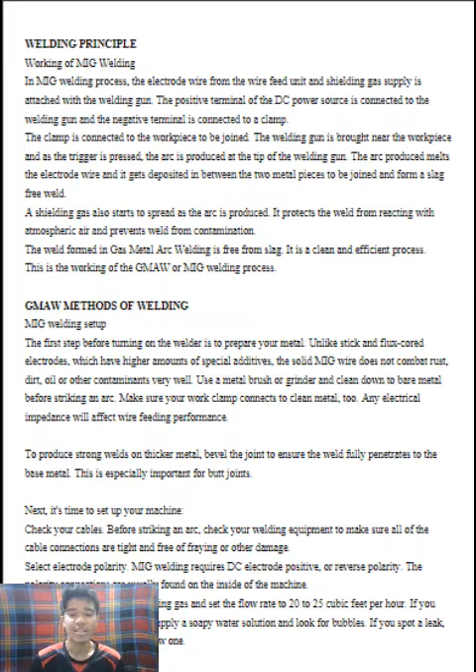First, the working of MIG. In MIG welding process, the electrode wire from the wire feed unit and shielding gas supply is attached with the welding gun. The positive terminal of the DC power source is connected to the welding gun, and the negative terminal is connected to a clamp. The clamp is connected to a workpiece to be joined. The welding gun is brought near the workpiece, and as the trigger is pressed, the arc is produced at the tip of the welding gun.

The arc produced melts the electrode wire and it gets deposited between the two metal pieces to be joined, forming a slag-free weld. A shielding gas also starts to spread as the arc is produced. It protects the weld from reacting with atmospheric air and prevents contamination. The weld formed in gas metal arc welding is free from slag. It is a clean and efficient process. This is the working of GMAW or MIG welding process.

Next is MIG welding setup. The first step before turning on the welder is to prepare your metal. Stick and flux core electrodes have higher amounts of special additives. The solid MIG wire does not combat rust, dirt, oil, or other contaminants very well. Use a metal brush or grinder and clean down to bare metal before striking an arc. Make sure your work clamp connects to clean metal too, as any electrical impedance will affect wire feeding performance.

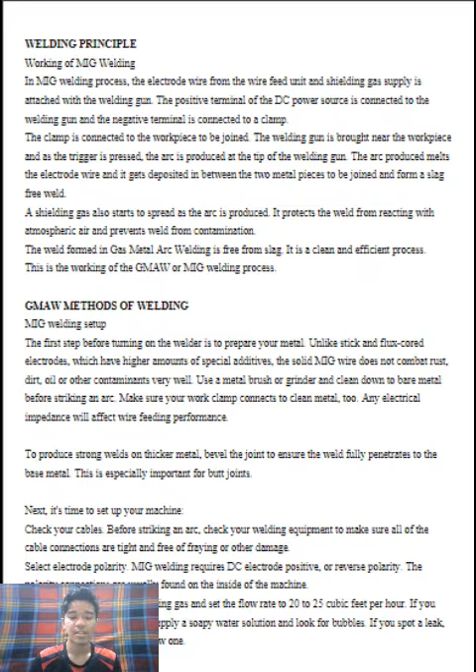Check tension. Too much or too little tension on either the drive rolls or the wire spool hub can lead to poor wire feeding performance. Adjust according to your owner's manual. Inspect consumables. Remove excess spatter from contact tubes. Replace worn contact tips and liners and discard the wire if it appears rusty.

Next is welding equipment. Besides the welding gun, the actual equipment required for the GMAW process includes an electric power supply, the electrode wire feed unit, and a source of shielding gas. The gun guides the electrode wire, current wire, and shielding gas tube. As described in the next section, self-regulation of the arc length is maintained by a constant voltage power supply with a constant wire feed speed unit.

Alternatively, a constant current voltage supply can be used with arc voltage controlling the wire feed speed. Next is shielding gas. The major shielding gases used for the GMAW process are oxygen, argon, carbon dioxide, and helium, or a combination of these four gases. The gases used in the shielding gas system can be classified either as inert gases, which have their outer electron subshells completely full and are stable, or chemically reactive gases, such as carbon dioxide and oxygen, which do not have their outer electron shell filled, making it possible for bare electrons to combine with other elements in the welding zone to create impurities.

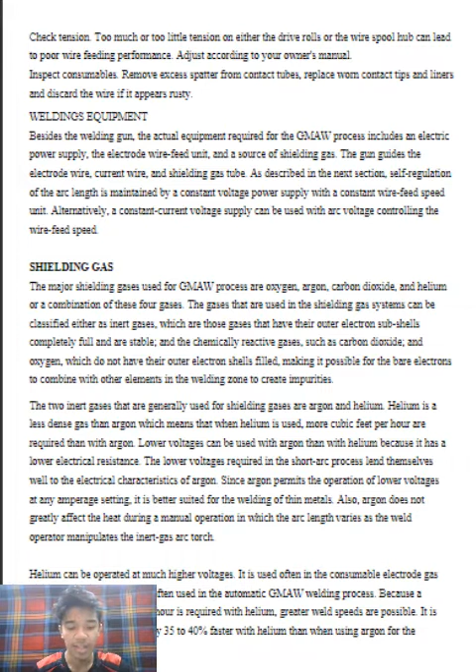Also, argon does not greatly affect the heat during manual operation, in which the arc varies as the weld operator manipulates the inert gas arc torch. Helium can be operated at much higher voltages. It is often used in the consumable electrode gas arc welding process, and it is often used in the automatic GMAW welding process because a greater flow of cubic feet per hour is required with helium. Greater weld speeds are possible; it is possible to weld approximately 35 to 40% faster with helium than when using argon as the shielding gas.

Lastly, GMAW electrode.

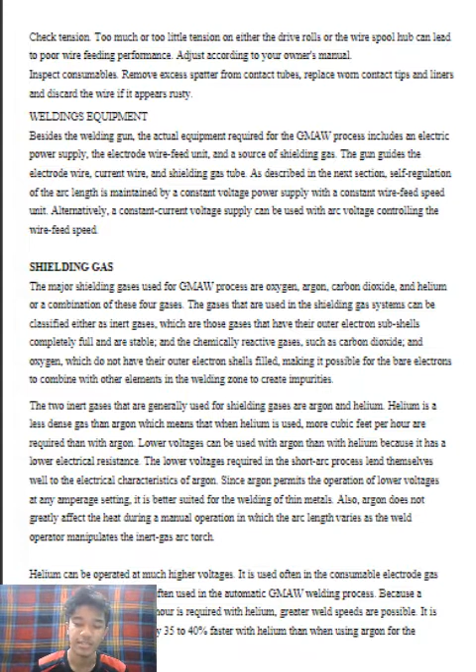Gas metal arc welding.

GMAW is an arc welding process that uses a consumable wire electrode and shielding gas, which a welding gun feeds to the joint. An electrical arc between the wire and base metal generates heat that melts both, while shielding gas protects the molten weld pool from harmful atmospheric gases.

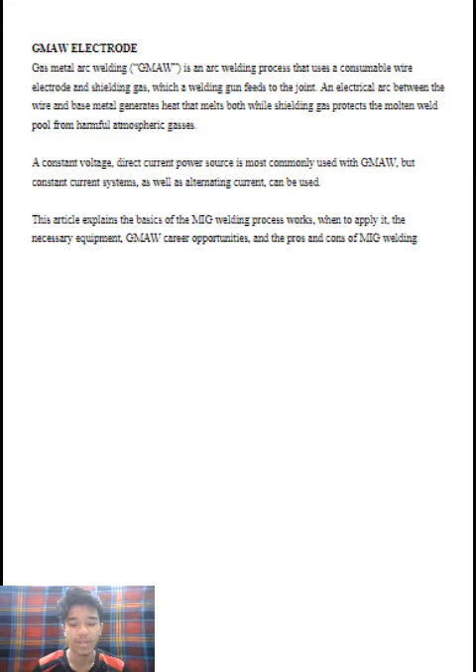A constant voltage direct current power source is most commonly used in GMAW, but constant current systems as well as alternating current can also be used.

These articles explain the basics of how the MIG welding process works, when to apply it, the necessary equipment for GMAW, career opportunities, and the pros and cons of MIG welding.

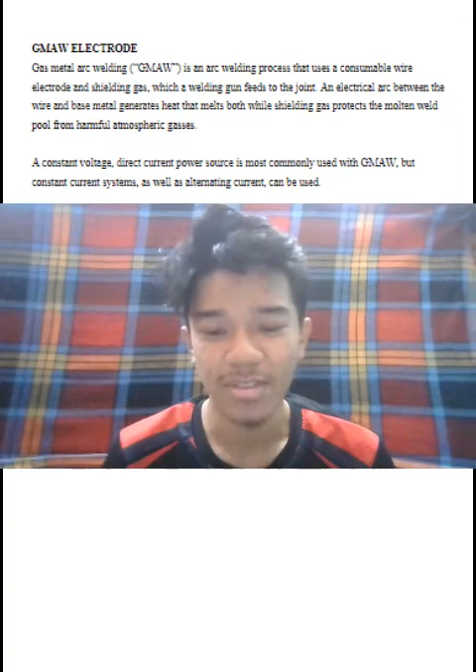Today I'm going to list the advantages and disadvantages of GMAW compared with other arc welding. Advantage 1: minimal cleaning, no slag.

2. Good for through-hardened or dirty steel with risk of porosity. 3. GMAW can be fully automatic, resulting in higher productivity. 4. GMAW tends to produce a better quality weld.

5. Easy to control electrode consumption. 6. GMAW can be used for all metals and alloys. 7. GMAW machinery is easy to use.

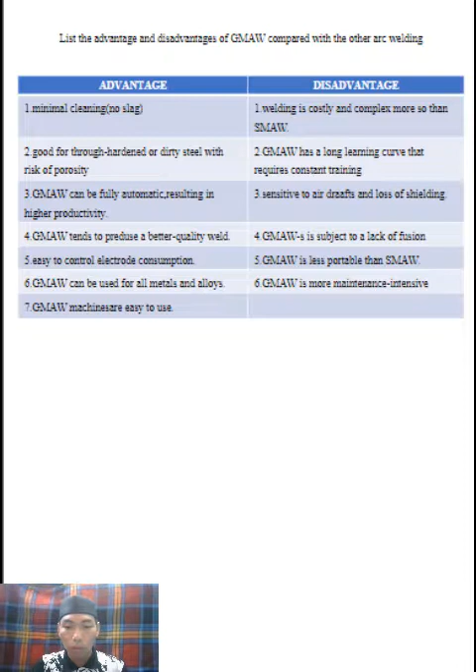Disadvantage 1: Welding is costly and more complex than SMAW. 2. GMAW has a long learning curve that requires constant training.

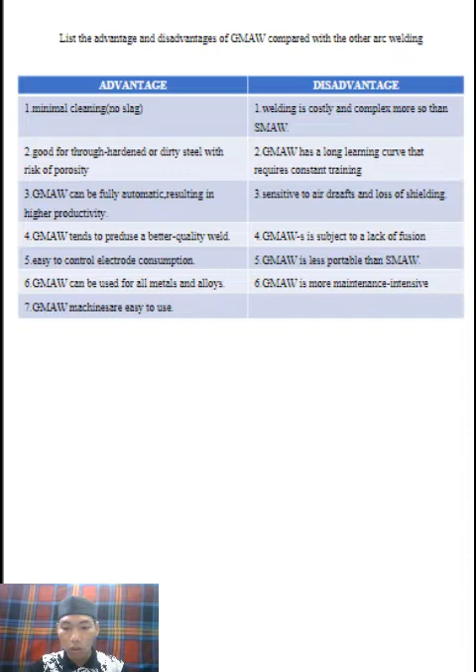3. Sensitive to air draft and loss of shielding. 4. GMAW is subject to a lack of fusion.

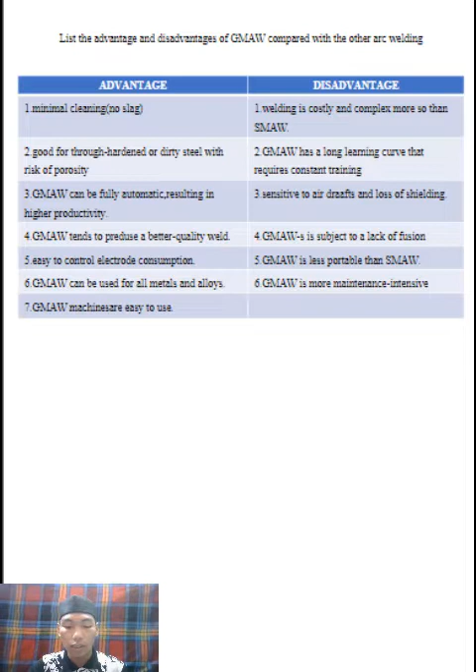5. GMAW is less portable than SMAW. 6. GMAW is more maintenance intensive.

Introduction to TIG welding. TIG welding is known as gas tungsten arc welding. It is an arc welding process that produces the weld with a non-consumable tungsten electrode.

Tungsten inert gas welding became an overnight success in the 1940s for joining magnesium and aluminium. Using an inert gas shield instead of a slag to protect the weld pool, the process was a highly attractive replacement for gas and manual metal arc welding.

TIG has played a major role in the acceptance of aluminium for high-quality welding and structural applications.

The method of using TIG welding: we form an arc between a pointed tungsten electrode and the workpiece in an inert atmosphere of argon or helium. The small, intense arc provided by the pointed electrode is ideal for high quality and precision welding.

The welding equipment used for TIG welding is, of course, a TIG welder. The TIG welding machine must support AC TIG output for welding aluminium. Second is the tungsten electrode. The kinds of tungsten electrode used for TIG are lanthanum, cerium, thorium, and pure tungsten rods, with pure tungsten rods being most commonly used.

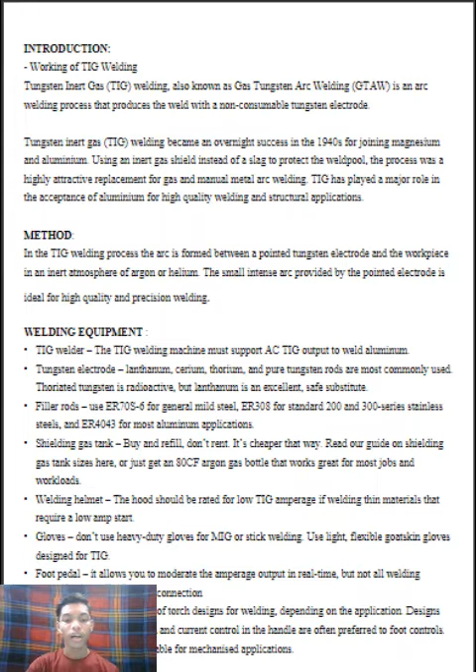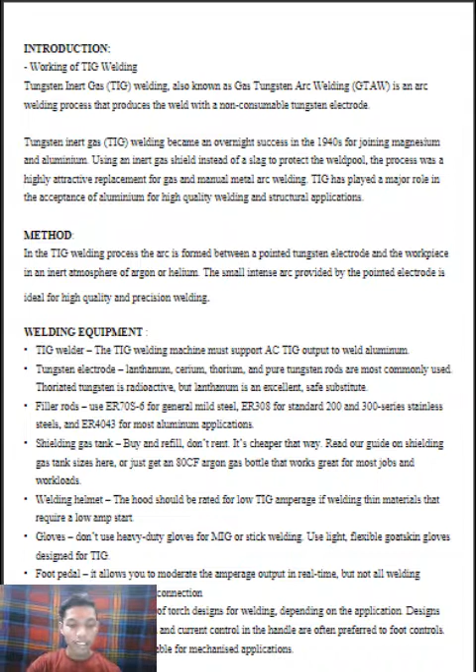The hood should be rated for low TIG amperage if welding thin material, it requires a low amp start. Next is gloves, then foot pedal, and lastly the torch.

Shielding gas: the tungsten inert gas TIG welding procedure, as the name suggests, calls for the use of an inert shielding gas to prevent oxidation of the tungsten electrode and the molten metal. Inert gases don't interact with the welding material in any way, guaranteeing a safe, stable environment for the arc and the pool of molten metal in the joint.

This protection is crucial. Lastly is the electrode. Tungsten electrodes are used when arc welding with the tungsten inert gas TIG process or when plasma welding. In both processes, the electrode, arc, and weld pool are protected from atmospheric contamination by inert gas.

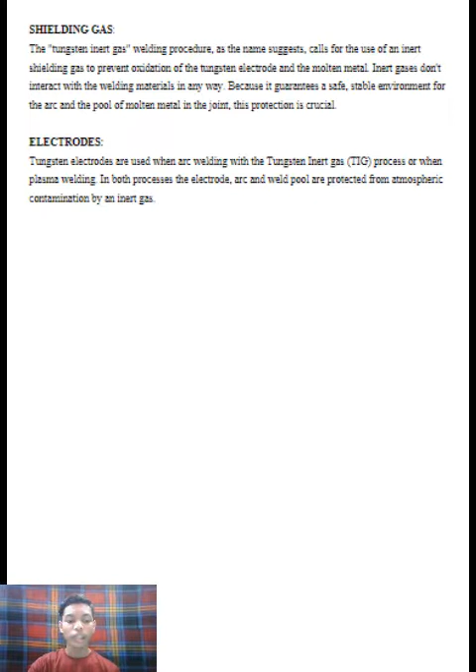The advantage is no flux is used in gas tungsten arc welding, therefore there is no flux entrapment in the weld bead. Next, welds made with gas tungsten arc welding are stronger and more ductile than those of other metal arc welding processes. Third, TIG welds are more corrosion resistant.

Next, with GTAW, a wide variety of joint designs can be used because no flux is required. Next, gas tungsten arc welding provides protection to the weld from atmospheric contamination.

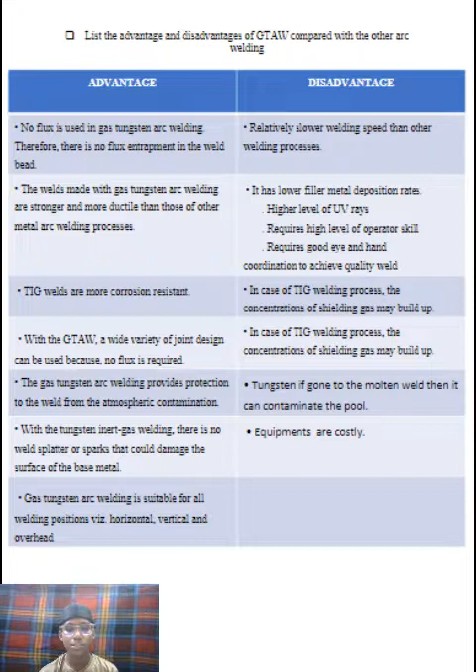Next, with tungsten inert gas welding, there is no weld splatter or sparks that could damage the surface of the base metal. Gas tungsten arc welding is suitable for all welding positions such as horizontal, vertical, and overhead.

I will move to the disadvantages. The first disadvantage is relatively slower welding speed than other welding processes.

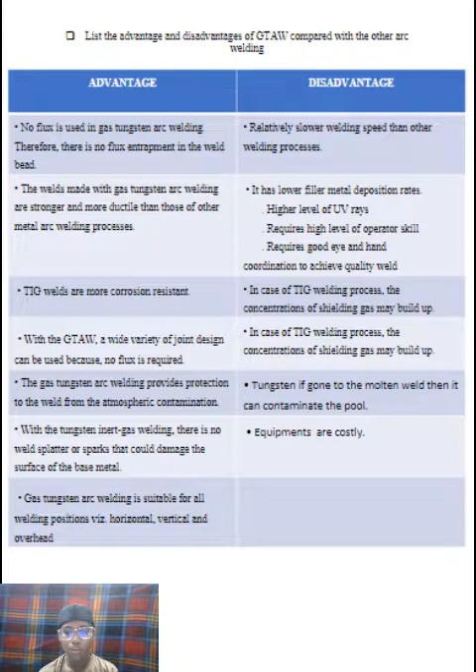Next, it has lower filler metal deposition rates, produces higher levels of UV rays, and requires a high level of operator skill, requiring good eye and hand coordination to achieve a quality weld. In the case of the TIG welding process, the concentration of shielding gas may build up.